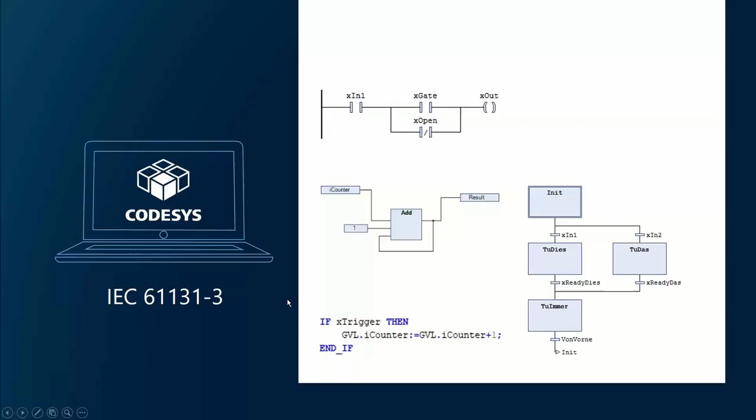Seems that my computer has today a little bit of a problem. This is the reason why I was a little bit late this morning.

However, CODESYS is not only a programming tool, but it includes visualization as well, meaning you can realize graphical user screens. It includes field bus systems with configurators and protocol stacks. Furthermore, it includes motion control, CNC, and robotics—you can immediately realize motion control systems with these tools without leaving them.

And last but not least, it includes safety possibilities. So all these functions are seamlessly integrated, sometimes as options, but they are there.

Now, how to make a controller programmable with CODESYS? There are two possibilities. Those of you who are device manufacturers can implement the so-called CODESYS runtime system, and for that purpose we support a lot of different CPU platforms—the most common being Intel, ARM, Infineon—and the most common operating systems such as Windows, Linux, VxWorks, as well as some other CPUs and operating systems.

For those of you who are users and just want to use, for example, industrial PCs, you find in the CODESYS store soft PLC systems that you can immediately install on such devices or boards, turning them into compatible controllers.

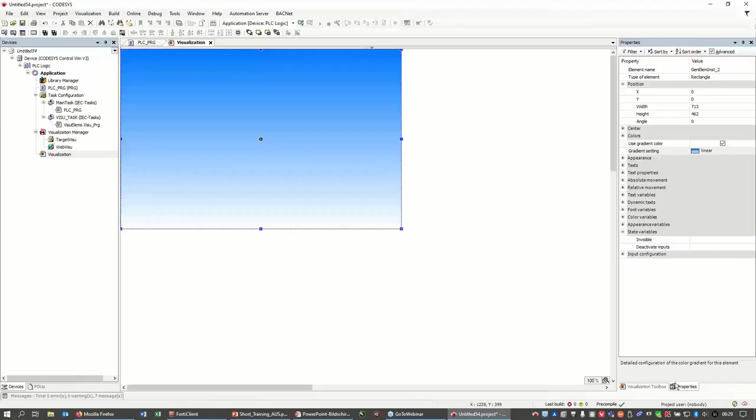So we have a nice background, and as the next step, we want to integrate some controls. For example, we want to switch that variable X trigger, which we just used. For this purpose, I have a dip switch inserted in here, and I connect it with the variable from my application, X trigger.

And I want to do the same thing with another element, take a meter element, which I put in here. And we connect that with the counter.

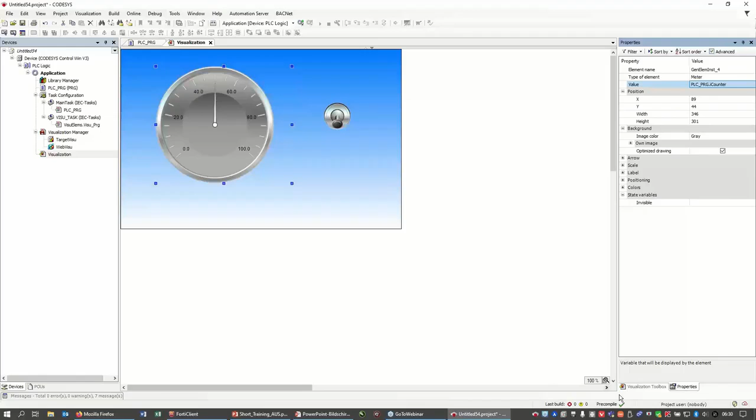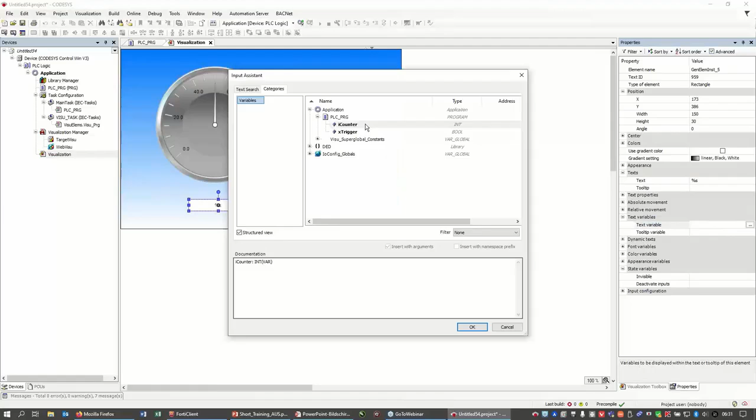And in order to be able to set the value of the counter, I will just add a very basic element, a so-called rectangle, which I configure then to be a text output for the variable, and therefore I choose a placeholder %s for that variable, counter, again. And I want to make it configurable via input, so I just make an input configuration for the variable that is chosen as the output.

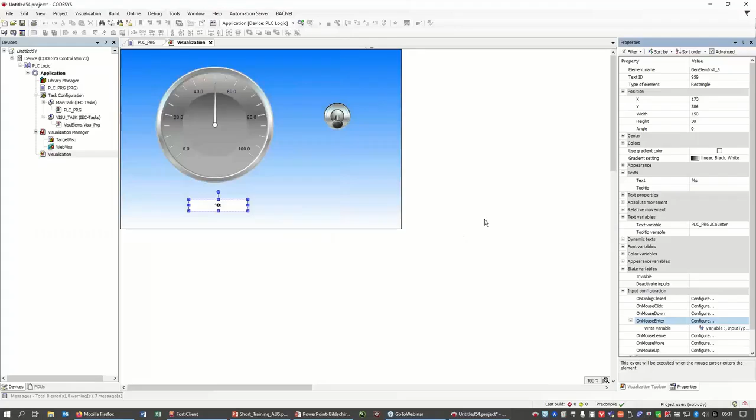So it's the display. Okay, you see this is quite fast. Of course, this is not a training, this is just a short presentation. And now we want to see what happens if we log in again.

So first step, we see that there's already the former application running. We will overwrite it right now again. And in this case, the compilation of the application takes a little bit longer because you see that the code is tremendously increased. We had before 90 kilobytes, now we have 1.4 megabytes. This is due to the fact that the graphics are as well compiled.

And now you see two different screens. I switch back to my CODESYS development system. So you see that the former editor is now turning into an online mode, so I can now immediately work with that. And furthermore, there was a blank screen open. This is the so-called target visualization, which we have in here.

So you could use, instead of an operator screen which is running within the development system, a full screen mode, which is of course much more suitable in case we are running such a visualization on a machine, because you usually do not want to offer the operator of the machine the possibility to do something inside the programming. Therefore, you can really have a separated screen which he can just use for operation but not for programming.

However, I can use now both of them. I can switch now that switch in here, and you see that my meter element, which I just configured to a maximum of 100.

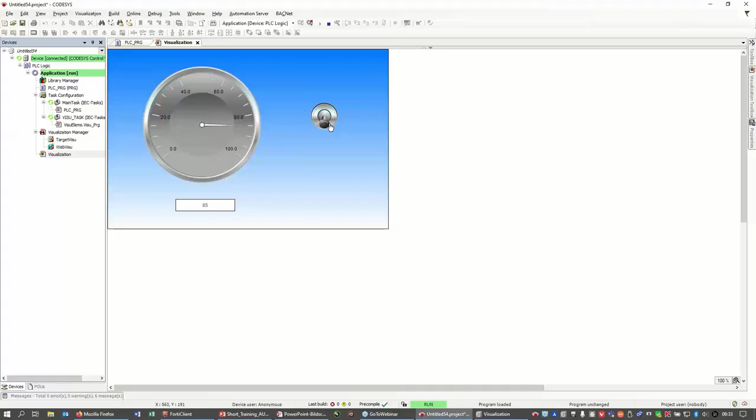So in order to change that, I can reset that to 0 and stop it shortly before. I could do the same thing here as well on that target visualization. Furthermore, there's a second option here, web visualization. For that purpose, I go to my Firefox browser, and I have a short link here already connected, which is localhost webvisu. And you see the same screen here again. I can now reset that to 0 and start the counting up again.

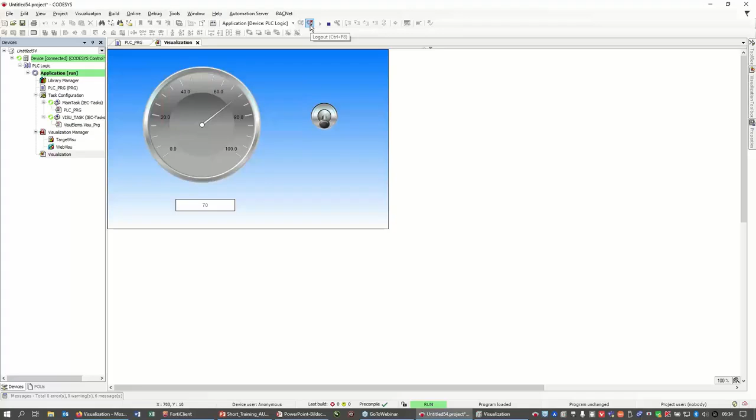This is quite nice in order to visualize what I'm programming. Of course, this is not only handy during the operation of a machine, but as well during commissioning, because you can then much easier prepare the screens for the commissioning purposes. Almost every CODESYS user works with that visualization because it's integrated, and in the first issue directly inside the development system, it's free of charge and you can immediately benefit from it.

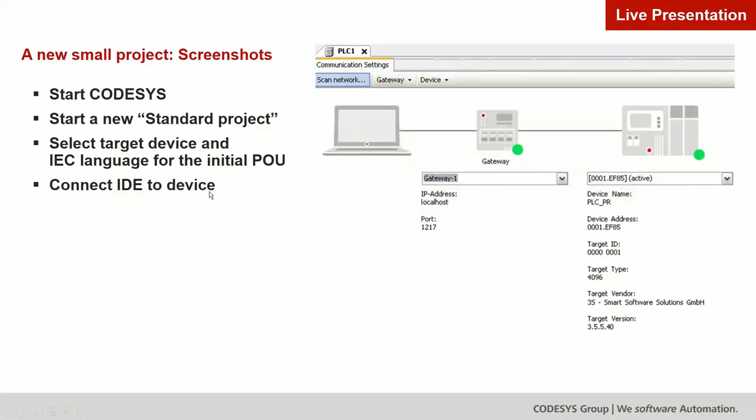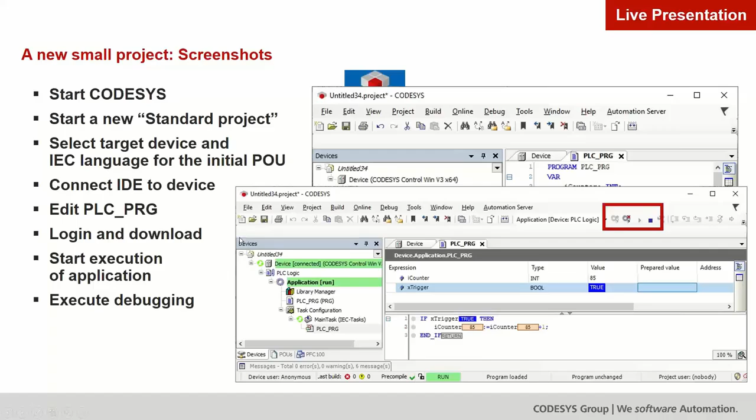So I switch back to my presentation. This is what we have seen here. Now we have started CODESYS, made a new project, inserted a controller, built up the connection. We had the editing and realized the first simple project, logged in, downloaded it, and executed it. And we already went to the second step. We integrated the visualization and operator screen.

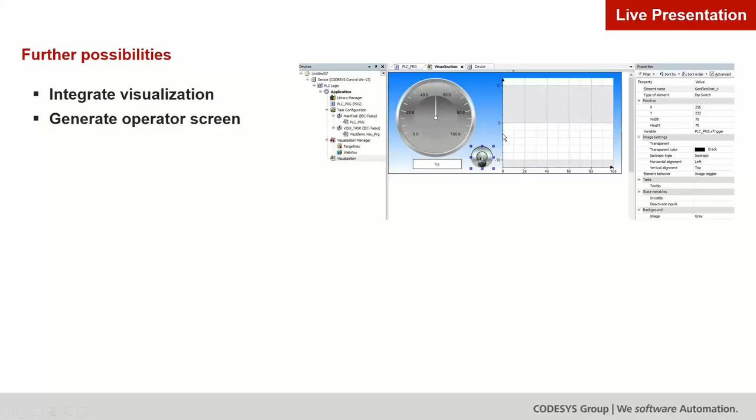As I did it here. Perhaps we add another object. I could do that, I forgot to do that. Perhaps we do that right away. We insert a trace element, which is quite handy too. This is under special controls. Insert the trace. Perhaps we move that a little bit to the right.

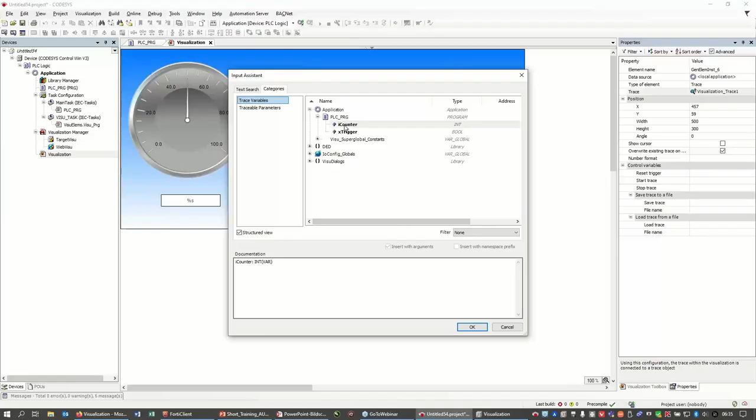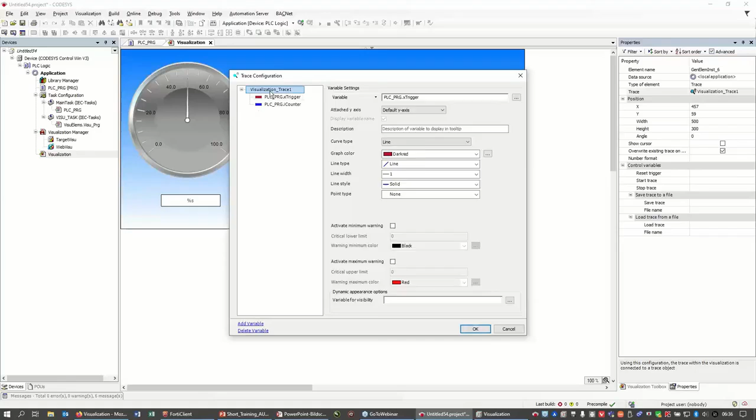And then in the trace element, I can now add variables which should be traced. For example, in this case it's quite easy. We have just two variables, iCounter, which will then be displayed in blue, and we add the other one, the xTrigger. You could choose, for example, another color. Let's take something dark red, for example. And what we have to do is to define the task in which this trace will be executed.

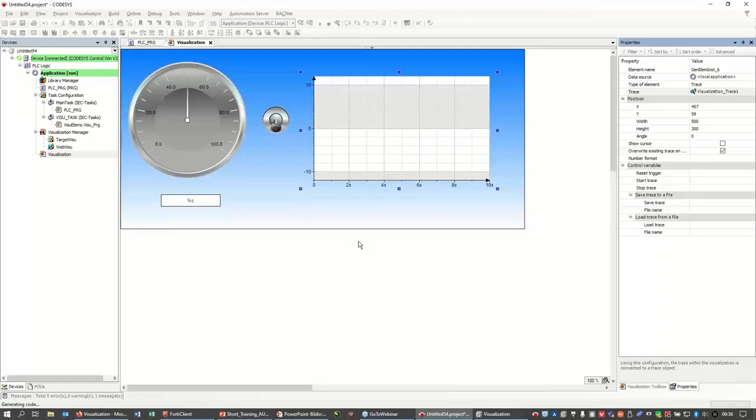Log in once again. And you see here that CODESYS offers even a possibility called online change. This means that the application is still running on the controller, and I can not overwrite it, but I can just add, for example in this case, the new visualization, but I could do the same thing as well with code part. So this is just added, no variable information, no values are lost. I'm just continuing with the work.

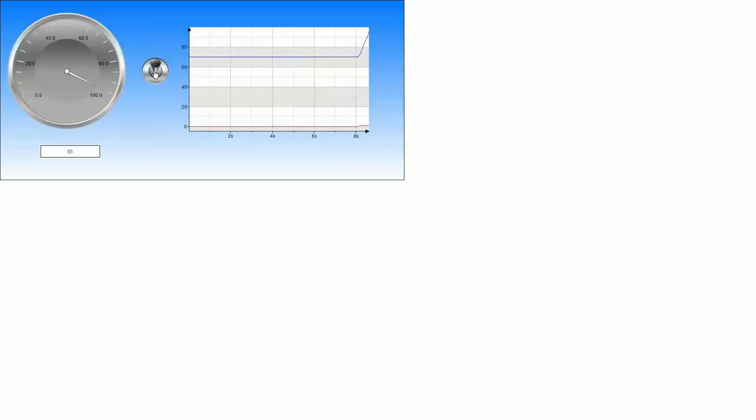And you see here that I have now such a trace running, and as soon as I start, and as soon as I change that variable in here, we see the tracing. It's just a little bit too fast for seeing as well the switch. We see it a little bit here, that there is as well the switcher, which is the same scale, of course 0 and 1, a little bit too small to see.

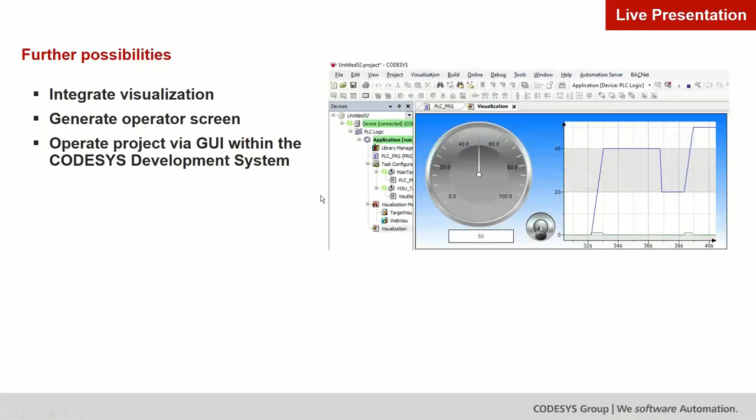Okay, so this is visualization. Now we can operate it via the development system or via the web browser or in the target visualization, as we've just seen it. Now we want to as well communicate with the outside, with the physics outside.

And for that purpose I need, of course, some inputs and outputs, some IOs. As I said, I'm working here with a notebook computer, so it's quite hard to directly connect some senders or actors, and for that purpose I have now a special device with me. I can show you that. This is a small EtherCAT field bus coupler, which I've connected via Ethernet to my computer.

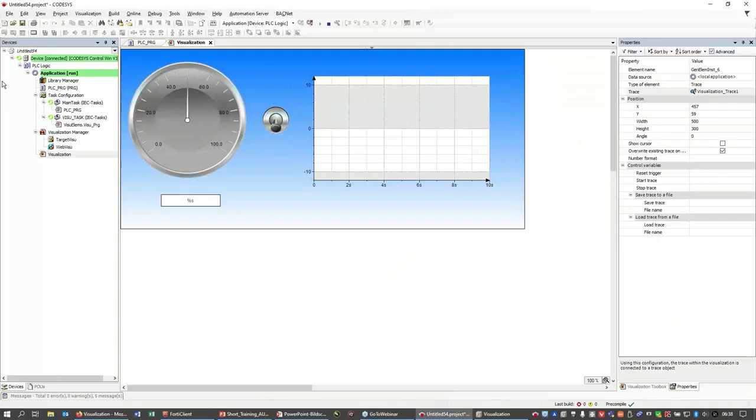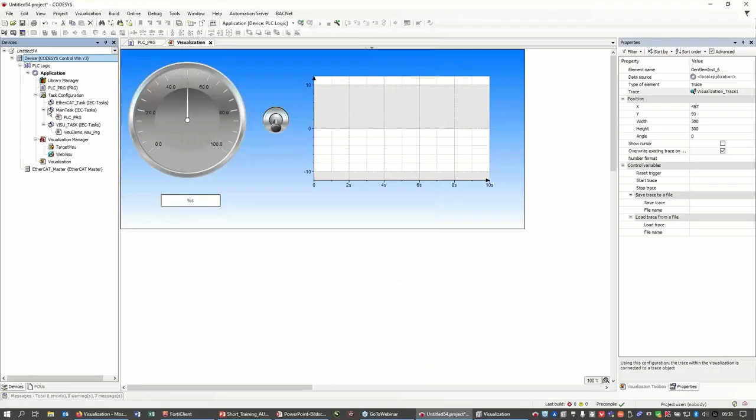And now we want to animate that. I go back to my CODESYS development system and go to the device and add here another device. You see there are different options. In this case, I go to the field buses and I take EtherCAT, insert an EtherCAT master, and I add the device. Again, here this takes a second because again here there is in the library manager a new library implicitly included, the IO driver EtherCAT, which realizes the protocol stack.

And I could do now in two different ways. I could, at first step, I need, of course, to configure which EtherCAT, with which Ethernet port the EtherCAT will be using. And I could type in the source MAC address if I know that, but it's, of course, much easier to browse the possible and available Ethernet ports on my computer. So this takes sometimes a little bit longer. Let's see whether it works.

Here's the screen, and you see that I have different options. In that case, I will take that Realtek USB to Ethernet adapter, because I have already connected my standard built-in Ethernet port to the network. So I take this one here, automatically have the MAC address connected, and then I could configure manually by adding the devices which I have connected here. This is one possibility, and of course this is a quite typical way to do it.

There's another way, and for that purpose I just log in once again and make another download of the application. In this case, remember that we have included the library. Now this library will be compiled and downloaded to the controller, which means the library code, including the protocol stack, is immediately available on the controller, and I can benefit from that code on the controller.

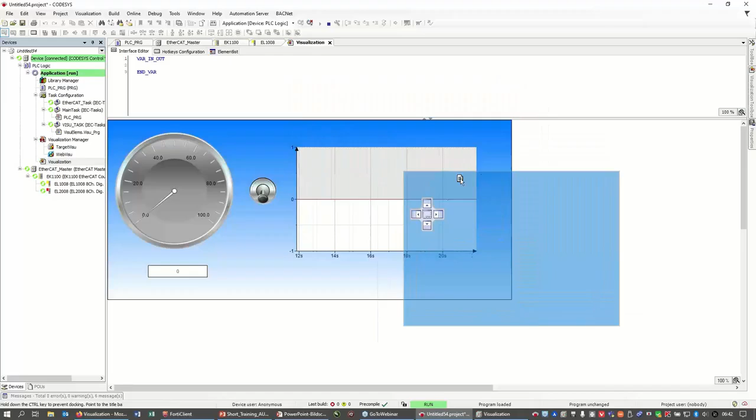Okay, then we see here on the left side, let's switch back, that the red triangles turn into these green elements, which shows that the EtherCAT stack is running. And if we open the visualization once again, perhaps in a side window so we can follow both, then the LEDs should run, and you see them, yeah? Stop that again, run that again.

So what you've seen is it's very, very easy and simple to connect such devices and configure them, execute such applications, and realize the communication to the physics, in order to really control the physics outside, to read in sensors, to write out actuators. Okay, so this is what I wanted to show you in that brief presentation.

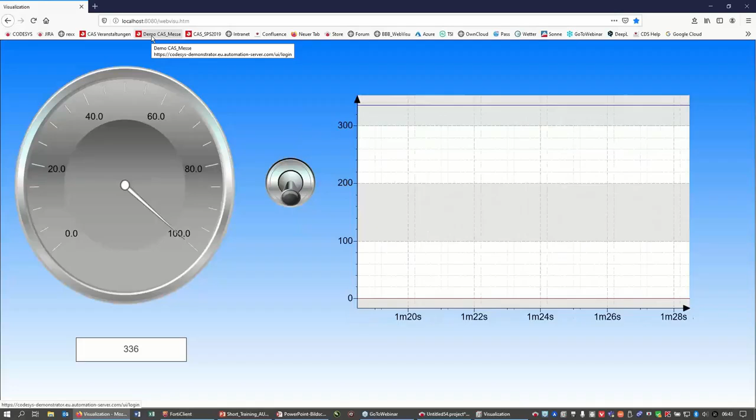Last but not least, I want to show you what you could do additionally, because what we've seen here is all connected to my local computer, but I can now connect my controller to an online administration platform, the so-called CODESYS automation server. For that purpose, I go back to my browser and open that CODESYS automation server, which is a cloud-based platform, and I log in.

With my login credentials, once again. And you see here, this is a cloud-based platform. I can have a direct overview. There are already some devices running, listed with green bubbles here; some are not available. How are they connected? They are connected via a so-called gateway - there are devices where the gateway is running, and these gateways are connected with a network of devices.

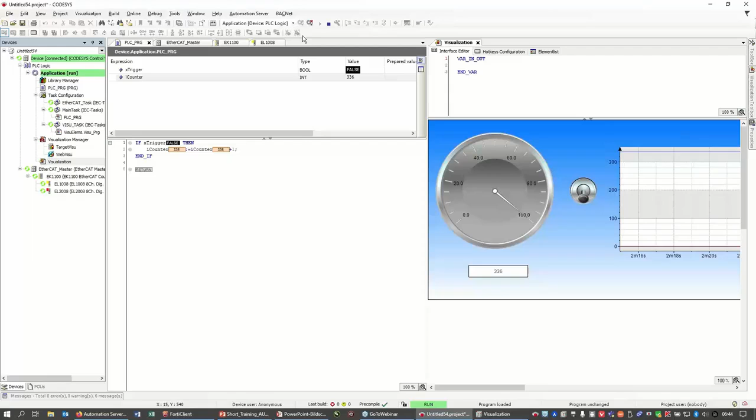What I can do right now is go back to my application and connect my local device via my local edge gateway, which is a service here on my computer. So I have the first step to connect it. For that purpose, I need to activate a so-called edge gateway configuration. This was disabled right now, but I can enable it. Then I need a name of a URL, which I can just copy.

Copy it in here. So then I need, of course, my login credentials as before, and then I can connect my gateway to this platform. If we restart that or just reload it again, then my local gateway is not yet showing - I forgot to add my name on the server. So, my edge gateway.

Okay, and then I can check and refresh, and connect it to the server. Here we are, and then we should be having it here as well. Yeah, here it is. And if I scan that network, I will see the same soft PLC as before. I can now add it to the server.

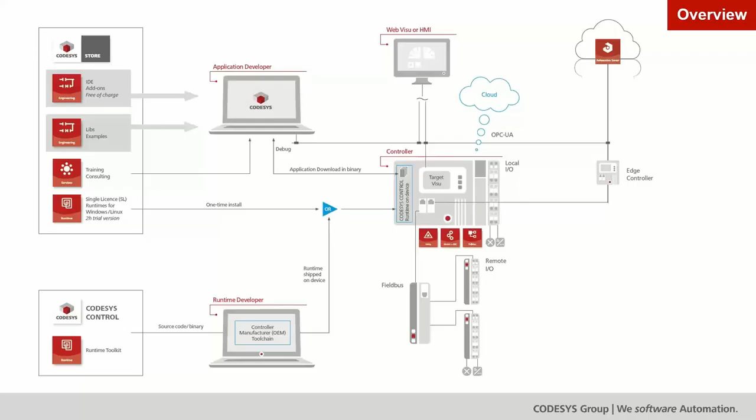And what you see here, in order to make such a device a controller, a CODESYS compatible controller, you can purchase that runtime toolkit as a device manufacturer and develop your own adaptation to that device you have developed. Or as a user, you can just go to the CODESYS store again and purchase the so-called single licenses for soft PLCs running under Windows or under Linux and install them on standard platforms. So this should give you a whole overview on the range of products.

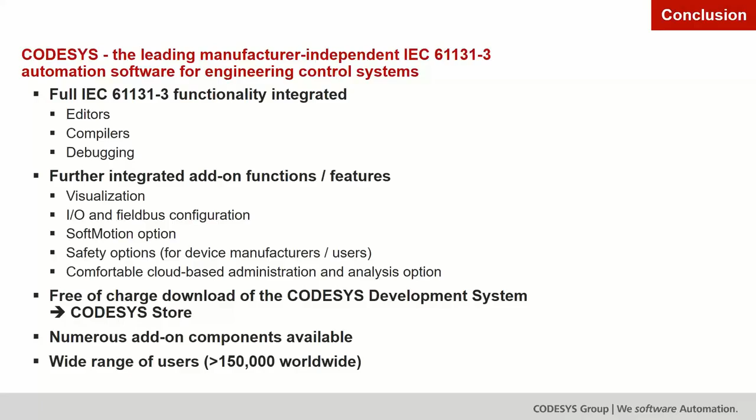Conclusion: CODESYS is a full functionality, full IEC compliant device. It's a tool which includes all the functionality of the IEC 61131, editors, compilers, debugging, with further integrated add-ons, as we've seen, visualization, I/O and field bus configuration, motion and safety, which I've just skipped, but what we have seen, the cloud-based administration. And you can download the whole tool free of charge from the CODESYS store, and as well some add-on components. As I said, we have a wide range of users.

Okay, this is it. I hand over again to Patrick. Oh no, I have some more slides.

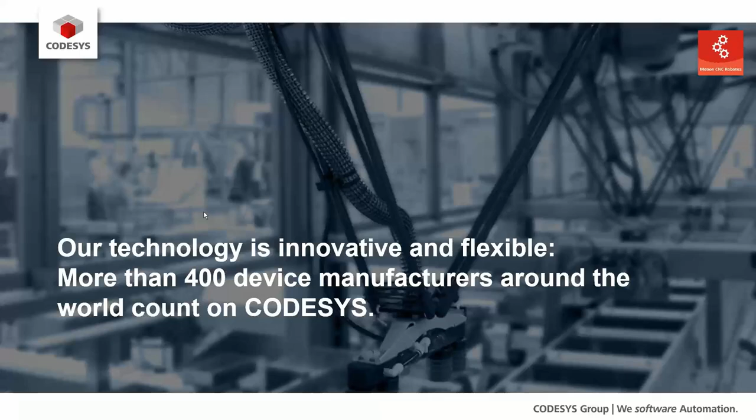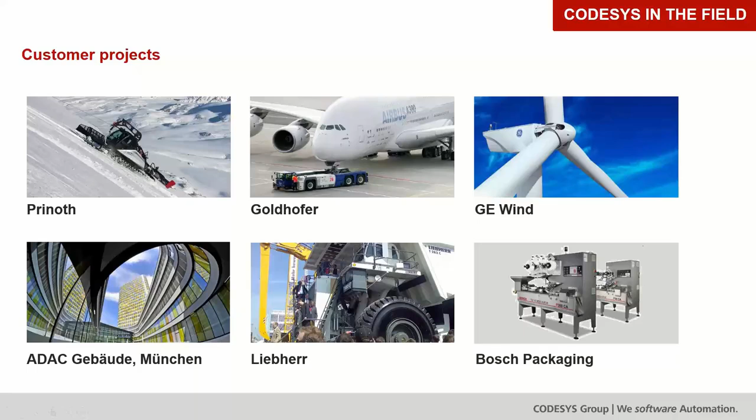Just to show who is working with CODESYS: more than 400 device manufacturers, and I have a list of them in here with the logos. Patrick already showed you the names of them, and some customer projects in mobile applications, in building, in energy automation, in packaging, in many other things.

Sorry to interrupt. There's a question from the audience for you, Roland: if you could change the controller, the device in the project, so everyone can see it's possible to really change the device easily without touching the rest of the code, as long as your project is still open.

Thank you, Martin, for the question. Yeah, as I said, we can easily change the target controller. We right-click, update device, and choose the device I need, which requires a so-called device description - it's a kind of device driver. In this case I'm working with a Windows-based x86 device, but I could easily switch to another one.

For example, this device here from Berghof - it's a PowerPC-based device with Linux. I say update device. So what happens in the background? All the compiler settings are changed to the device settings already prepared in that device description.

As soon as I have that device connected to my controller, I don't need to do anything else than connect the communication to the right device. So double click - my computer is a little slow this morning - search for the device, and you see my local soft PLC is greyed out here because it doesn't fit the device description I've now chosen.